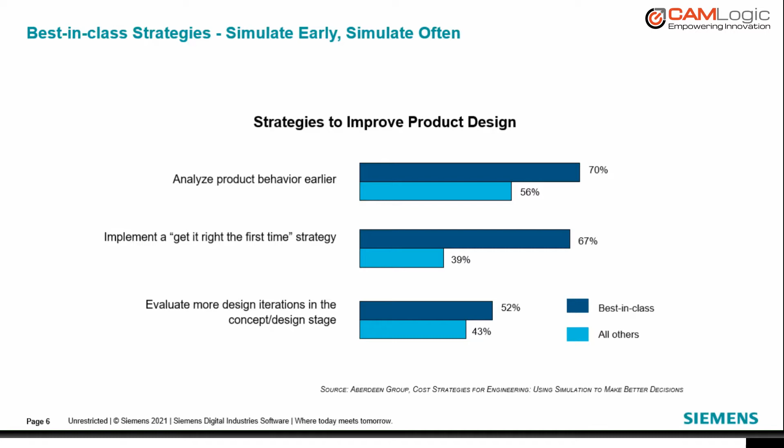So what are the issues facing design engineers today? The job that today's engineers are faced with has to cover a multitude of tasks in all phases of product development, including analysis, and involves the use of several products, each with its own user interface and method of working. Often, tasks like simulation are outsourced, which has the effect of separating analysis from the design process. This reduces the number of analyses that can be performed and prevents analysis from being used for investigative studies, which overall inhibits innovation in the design.

Some of the solutions available today are overly simplistic, which can compromise solution accuracy and create misleading results. The inability to edit geometry easily after analysis, and the lack of CAD associativity with simulation, inhibit the fast turnaround necessary for timely and effective design refinements.

Solid Edge simulation is one single integrated environment. It's using the same underlying geometry and user interface as all Solid Edge applications. Solid Edge simulation is easy enough for any Solid Edge user who has a fundamental understanding of FEA principles, yet robust enough to service most of your analysis needs.

By enabling engineers to perform their own simulation, more analysis gets done in less time, improving quality, reducing material costs, and minimizing the need for physical prototypes without incurring the high cost of outsourced analysis. The layout of the user interface is designed to guide the user through the whole analysis process, which makes it easy to learn initially and revisit if necessary.

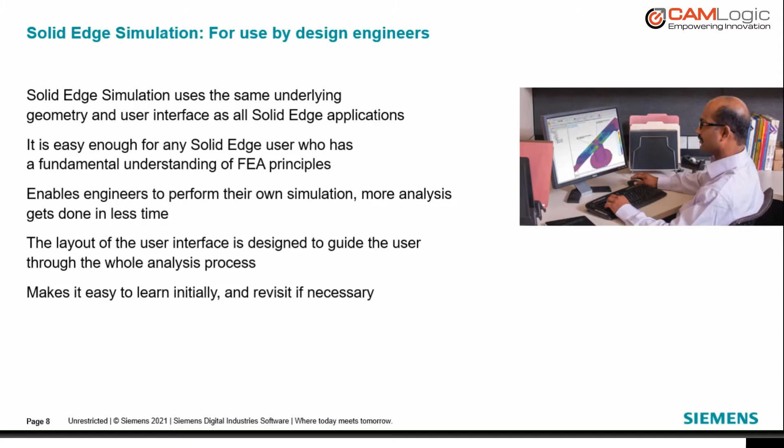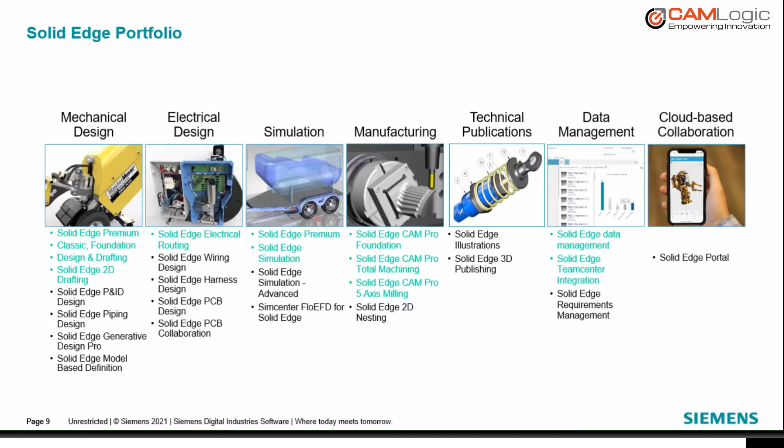This slide shows you the depth and breadth of the current Solid Edge portfolio. If you look at all the solutions highlighted in blue, these were all launched in the last few years, so a huge investment from Siemens into Solid Edge. Note that Solid Edge simulation goes into the third column, specifically dedicated to FEA products that are part of the Solid Edge portfolio. Siemens recognizes the importance of delivering highly capable analysis tools to the customer base.

SolidEdge portfolio covers the majority of analysis needs encountered by customers. Besides mechanical simulation, there are tools for heat transfer analysis. Thermal simulation in SolidEdge simulation is mainly thermal conduction, which is the heat transfer inside of objects.

This helps users simulate the thermal effects to the structure, such as thermal stress. The heat convection depends on the fluid flow, so it's important to simulate the fluid flow to understand the heat convection performance. FloEFD is the fluid flow simulation solution, and it can handle heat convection along with fluid flow.

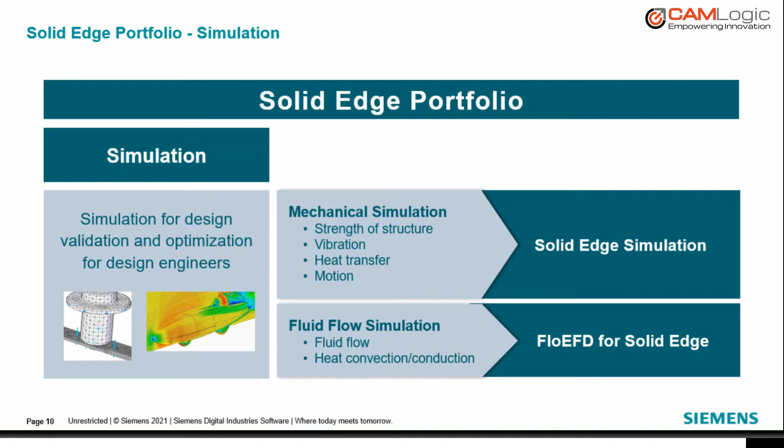SolidEdge simulation provides both automatic and manual methods of mesh creation, with precise local mesh control for higher accuracy. A full complement of loads and constraints is available for defining realistic operating environments. The underlying solver technology is Nastran, the de facto industry standard solver for finite element analysis.

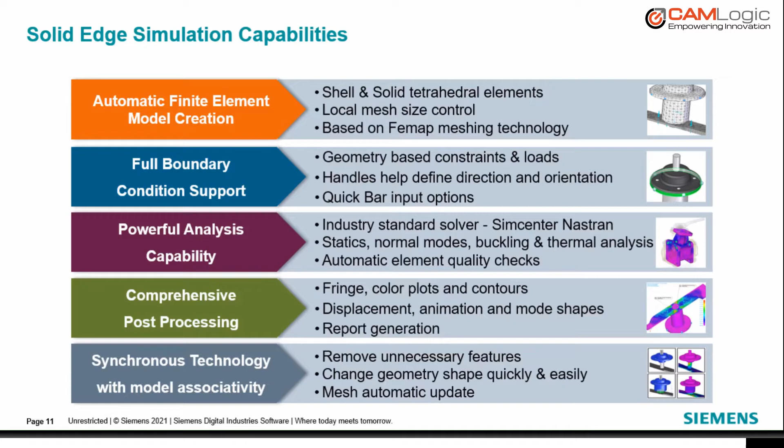A variety of analyses can be performed, including statics, normal modes, frequency response, buckling, and heat transfer. Users can interpret and understand the resulting model behavior quickly with comprehensive graphical post-processing tools. Synchronous technology allows for history-free model changes at will, which drastically speeds up the model refinement process.

SolidEdge simulation can take advantage of Simcenter FloEFD for SolidEdge, which is part of the SolidEdge portfolio. FloEFD is a fully CAD-embedded computational fluid dynamics software used to perform analysis of heat transfer and fluid flow design. Key FloEFD features include an intuitive user interface, meaning a short learning curve, and use of native SolidEdge CAD data.

No translation or fluid body creation is needed, with automatic recognition of model changes so geometry and simulation data are synchronized. There's a fast automated mesher and a unique solver that gets accurate results fast.

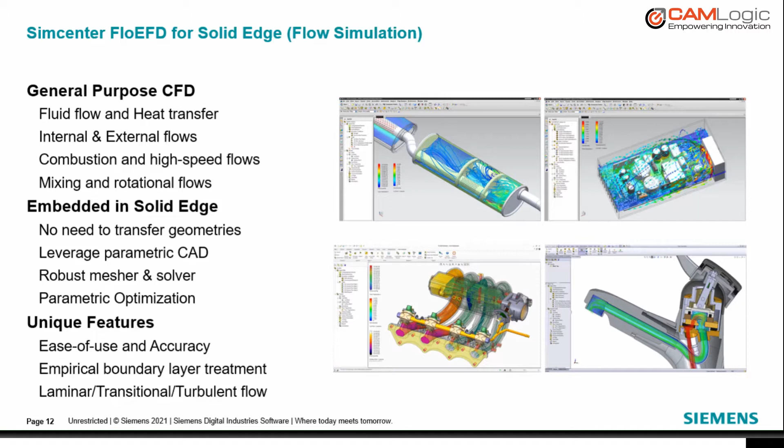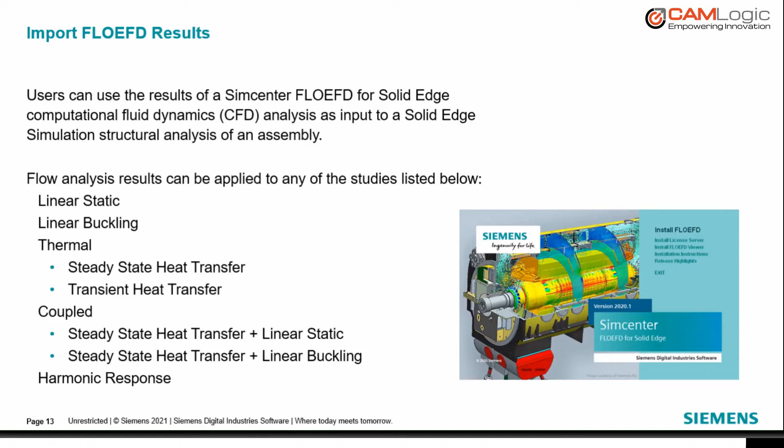Fluid pressure and temperature results can be imported from Simcenter FloEFD as structural loads for analysis. Integration between the two solutions is seamless and easy, as both are fully embedded in the SolidEdge environment.

Simulation functionality scales from individual parts to analysis of large assemblies, all the way to FEMAP with Nastran, enabling engineers to define and analyze complete systems. FEMAP is widely used in aerospace, defense, and marine industries, particularly for airframe loads, space vehicle stress and dynamics, and analysis of ship hulls and offshore platforms.

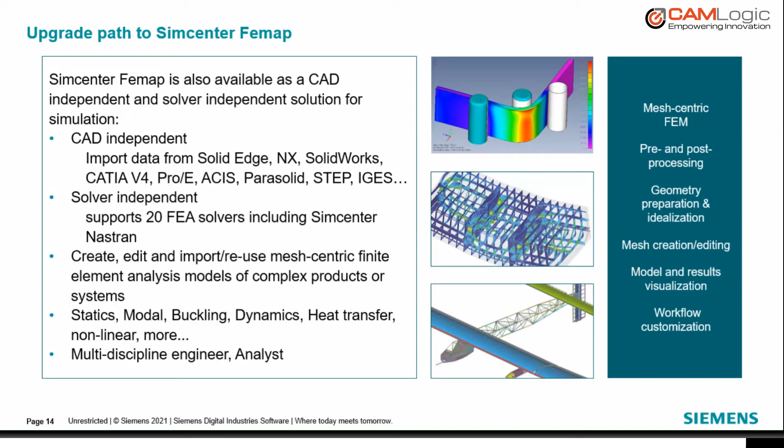The starting point for FEA model creation is generally the CAD model. FEMAP can be launched directly from SolidEdge, transferring in the geometry for analysis. FEMAP has extensive CAD model cleanup tools, in-depth functionality for mesh creation and editing, and can work well with orphan meshes for FEA model reuse.

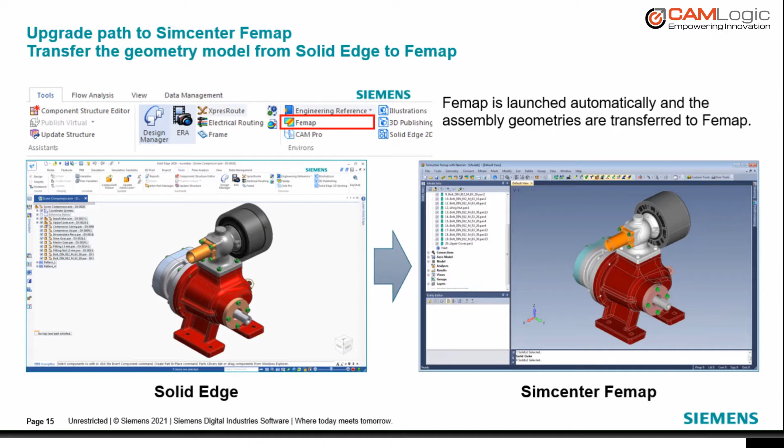Complete geometry and finite element models with boundary conditions and results can be seamlessly transferred from SolidEdge to FEMAP by saving the simulation model as a FEMAP file. Advanced types of simulation, such as nonlinear analysis, become easily accessible without losing any work done in SolidEdge simulation.

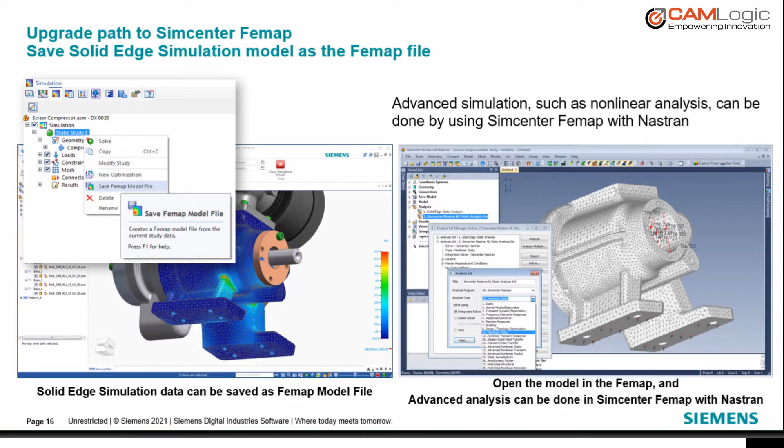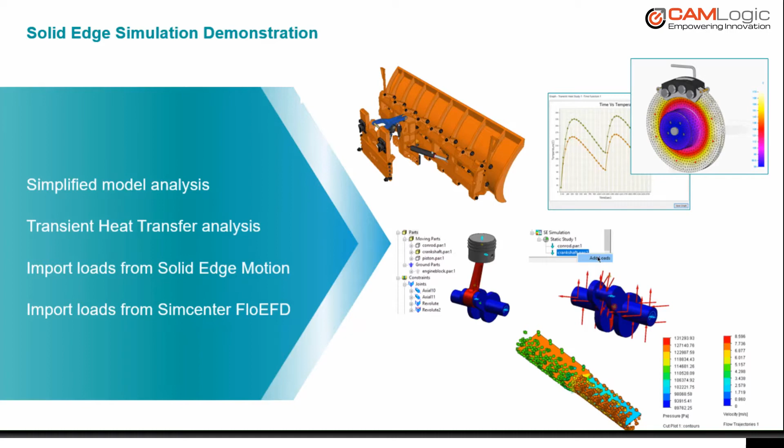So let's take a look at SolidEdge simulation in action. We're going to take advantage of tools available in SolidEdge, such as simplified models, as well as additional portfolio products for more accurate results. We're going to start by looking at SolidEdge simulation in action.

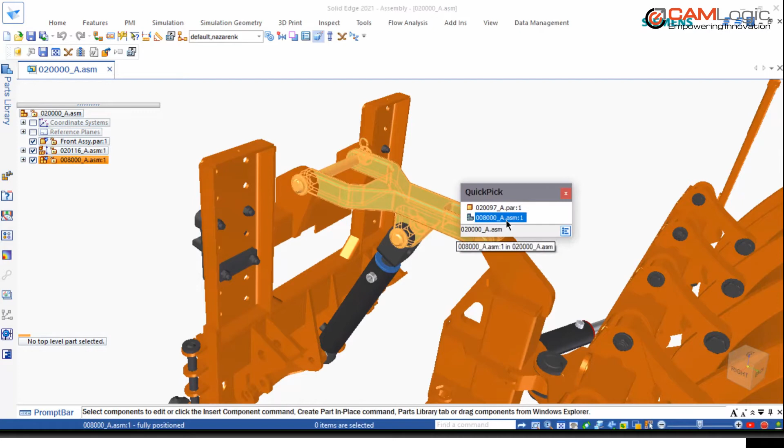For our first example, we're going to take a look at this plowing mechanism assembly that would be attached to a snow plowing machine. The first question would be how this bracket, or this arm connecting this mechanism to the frame, can withstand the loads introduced by Mother Nature. So let's open this assembly and focus on this particular mechanism.

First of all, I'd like to mention that SolidEdge simulation is tightly integrated with SolidEdge, and I'll prove this to you in a second. But first, let's isolate the information on the screen that we're going to be working with. One thing I'd like to point out is that one of the benefits of this tight integration is the ability to use SolidEdge functionality that helps us in setting up a study and getting results quickly and efficiently.

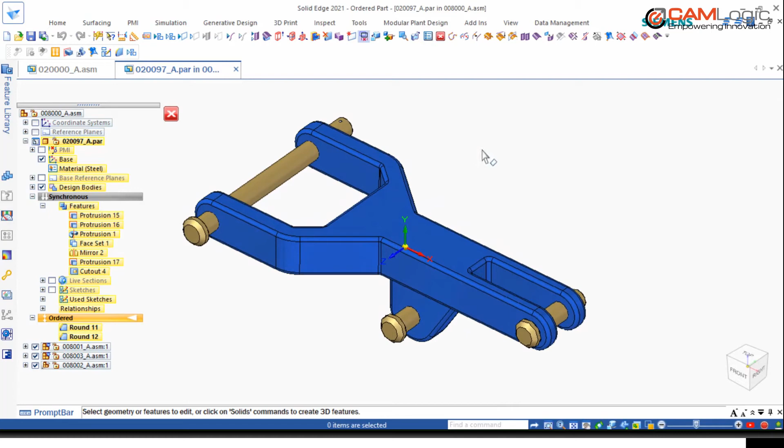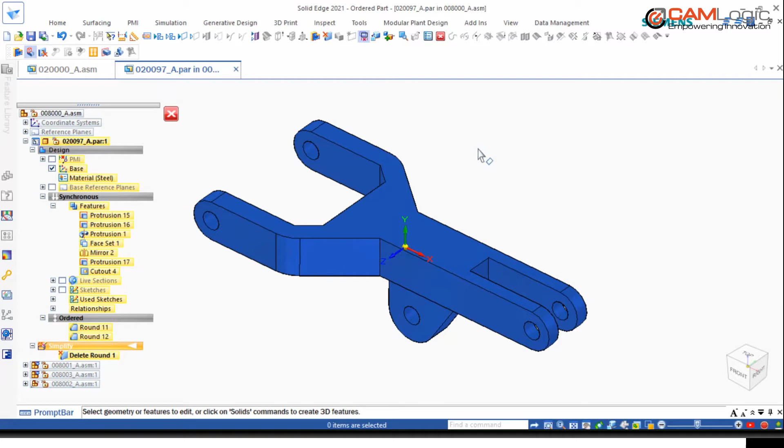First, I'd like to point out that we can take advantage of the ability to simplify the parts. This will reduce processing time and allow customers to get to the results much quicker. We can delete single rounds, or we can delete the whole feature. In this case, I just got rid of all the rounds in this part. And when I say delete, I didn't mean delete completely—I meant that we can take this part and use a simplified version of it for our study.

So let's start our simulation. It can be accessed directly from the simulation toolbar, and you can see I can create a new study. Here we provide the ability to analyze designs in many different ways. First of all, we provide the ability to do linear static analysis, normal modes, linear buckling, steady state heat transfer, a combination of linear static and buckling with heat transfer analysis, and harmonic response, which is essentially vibration analysis.

We also provide the ability to define different types of mesh, which is very beneficial because sometimes you deal with a thin wall component that requires a surface type of mesh, or even a mixed type of mesh when you combine regular models with thin wall components.

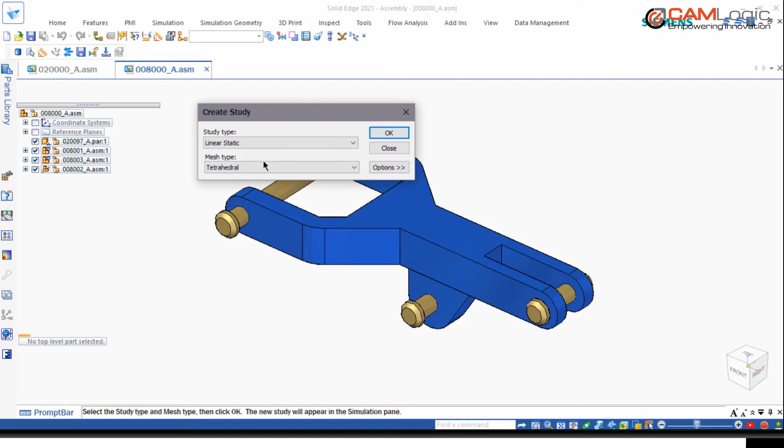Right now we're looking at linear static with tetrahedral mesh. We can select all the components and include them in our study.

One thing I'd like to mention is that the Solid Edge interface is very flexible and user-friendly. I can turn on the simulation sidebar and move logically from top to bottom applying loads and constraints, or I can go to the simulation tab on the command bar and move from left to right.

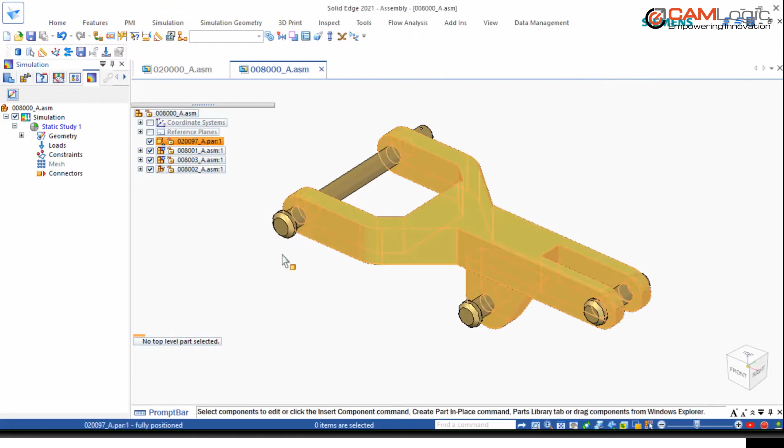So let's start applying some loads. Before I do that, I can go quickly to the original assembly and measure an angle. This allows us to more precisely, let's say if I measure the angle between the two faces, it gives us about 34 degrees. This will allow me to apply loads in a more realistic way, mimicking real life conditions.

So let's go and apply loads. Again, we have many different types of loads depending on the type of analysis. As you can see, right now we're doing linear analysis, so thermal loads are disabled. So we're going to start with force, and we're going to apply force to this particular pin.

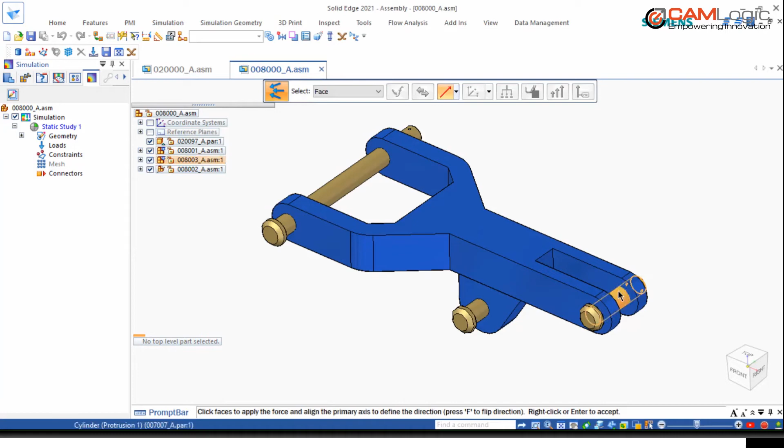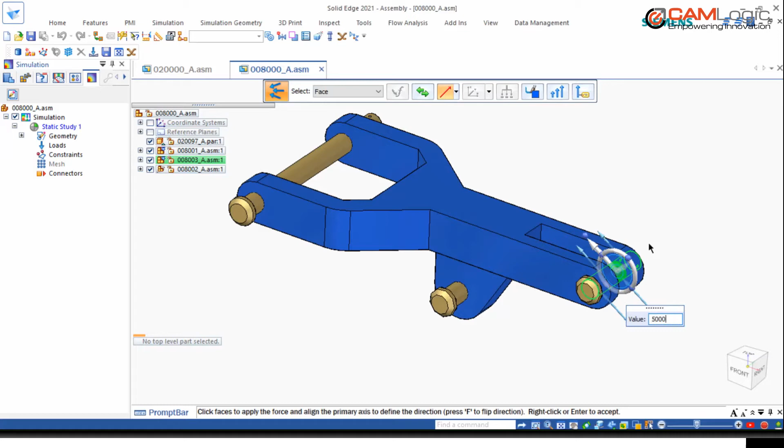One thing I'd like to mention is that the same tool we use to manipulate geometry, the steering wheel, we're also using for directing the force in this case. Conveniently, I can type in the value as a formula, and the system will allow me to position it properly. I'd also like to point out that Solid Edge Simulation is a units-neutral solution. So we can type in, let's say, 5,000 pounds of force, and the system will recalculate and apply the load appropriately in whatever units are currently active.

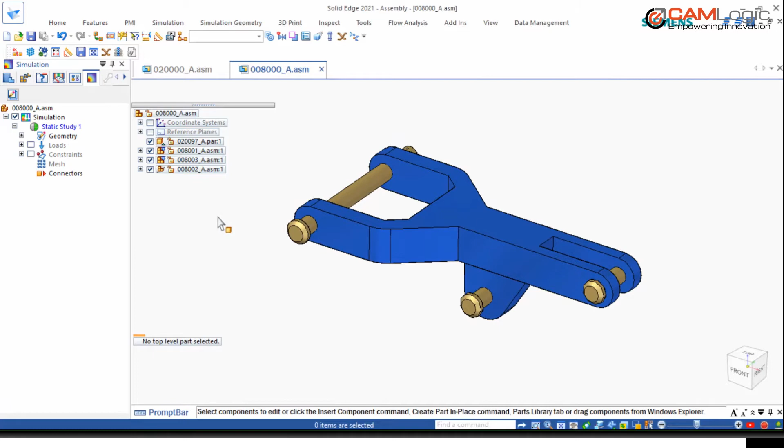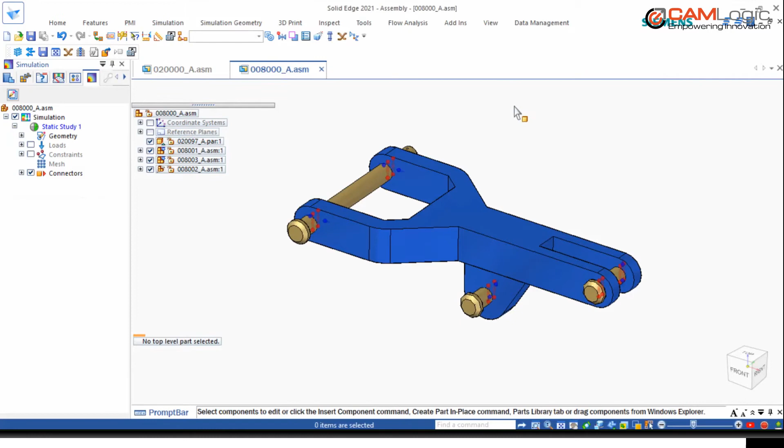As far as constraints, we have many different types. In this case, we're going to lock these two pins so we can run analysis against them. Finally, we come to a point where we need to define relationships between all these components. We can conveniently define automatic relationships by selecting all the components, and with one single button click, the system will present us with a list of different connectors we can use. If you want, you can get rid of some connectors, or delete multiple. In this case, I'm going to accept all the defaults. And in one single click, if I go to the mesh dialog box, I can mesh and solve immediately within the Solid Edge Simulation environment. This assembly isn't very complex, so we can easily use mesh and solve in one single operation.

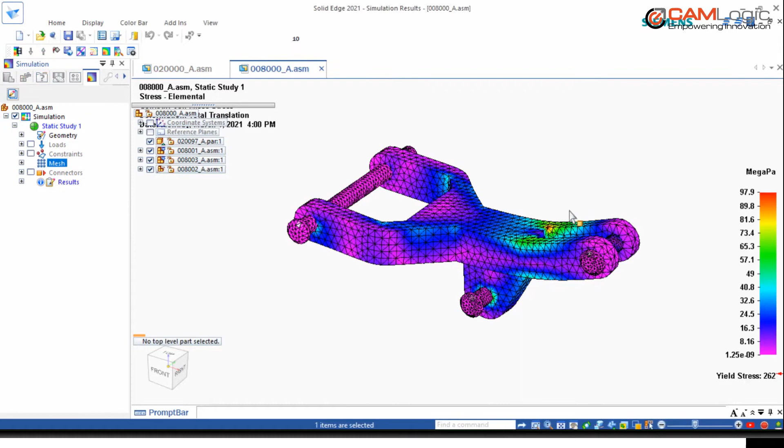Results pop in. We're looking at the post-processing window, which is really important for interrogating results, and it provides users with many different options. We can take a look at animation. It's a very important part of the interrogation because you need to evaluate how the system performs under stress and make any adjustments if necessary.

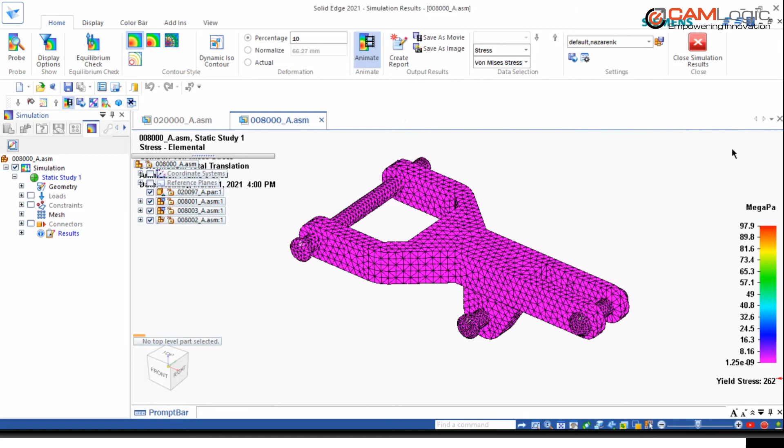You can turn different options on or off. You can save it as an AVI or movie. In this case, you can look at results in many different ways. One in particular is the ISO contour, where you can dynamically walk through your design and isolate a specific value for stress, and see how it distributes throughout the part.

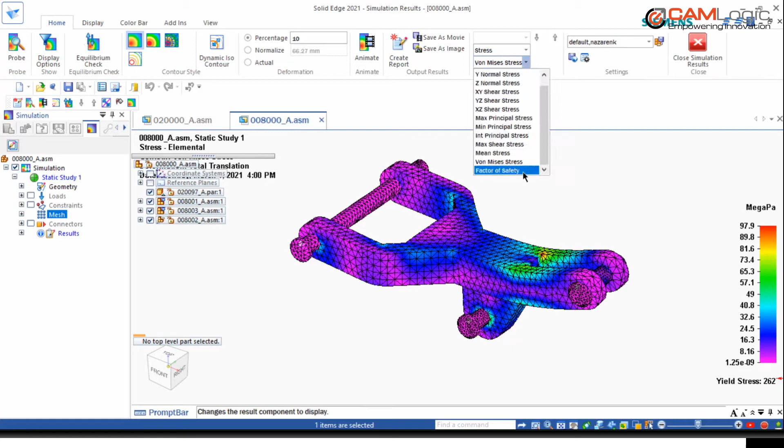In this case, I'm interested not only in stress but also factor of safety, because it's a very important component. So users can define different custom values. Let's say we're looking at a value between 4 and 5 since it's a very important component, and you can see this is not strong enough to support that factor of safety.

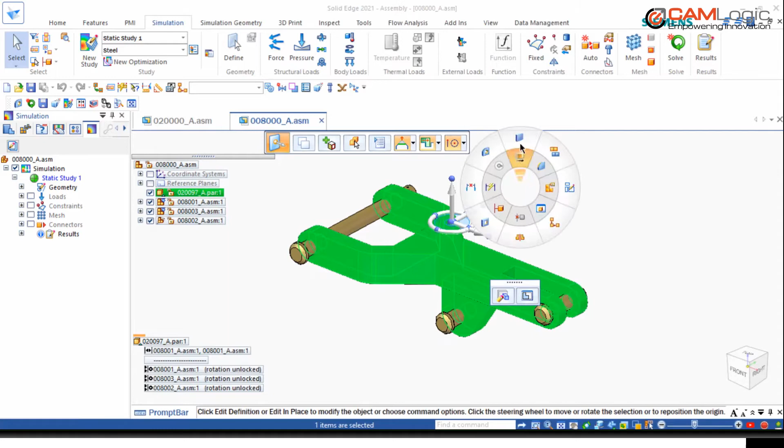So we can quickly go and customize our part. Again, conveniently, because it's one single integrated environment, I can immediately get access to the features of that part even from assembly level. I don't have to dive into the part.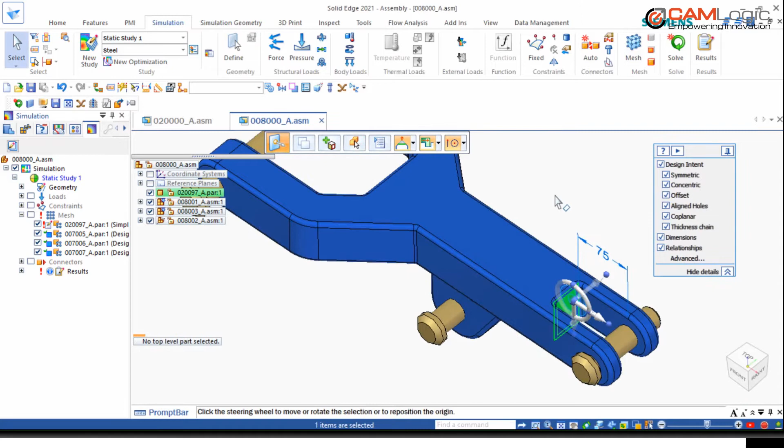I can pick this value and modify, make those ears slightly thicker. Also, maybe we don't need to have this so deep pocket here. Again, using synchronous technology, I can easily manipulate this geometry on assembly level without diving inside of the component. You can see how quickly I can manipulate this face on the ear on the bottom.

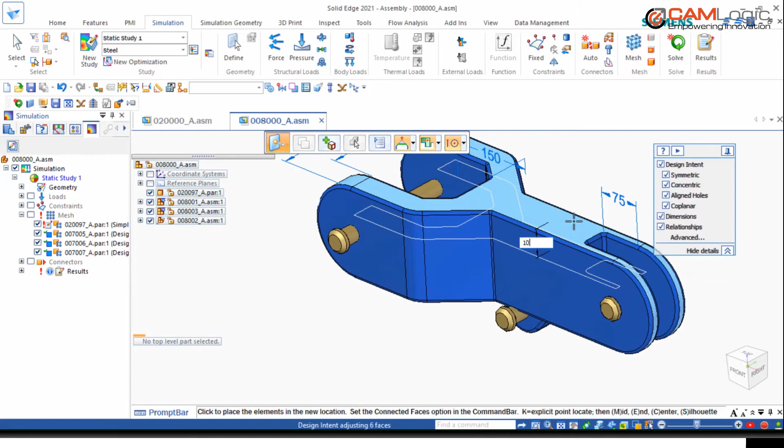Let's say I want to make it slightly stronger, and of course I can beef up the whole part if I want to, so let's make it thicker by 10 millimeters. You can see how quickly and efficiently I can modify the geometry, and it's pretty much done in no time without needing to go into the actual part.

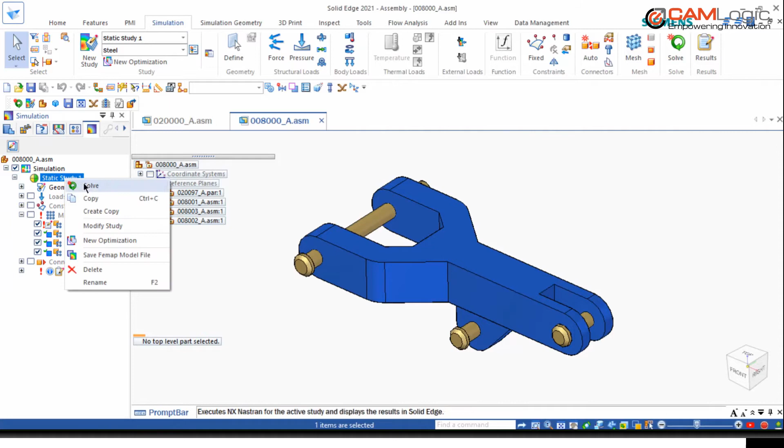And because it's one single integrated environment, not only are we using the same tools to manipulate geometry, but all I have to do is just click solve. The system knows how to remesh the model based on the new geometry configuration, it knows how to apply all those boundary conditions and loads, and we're going to get results in no time.

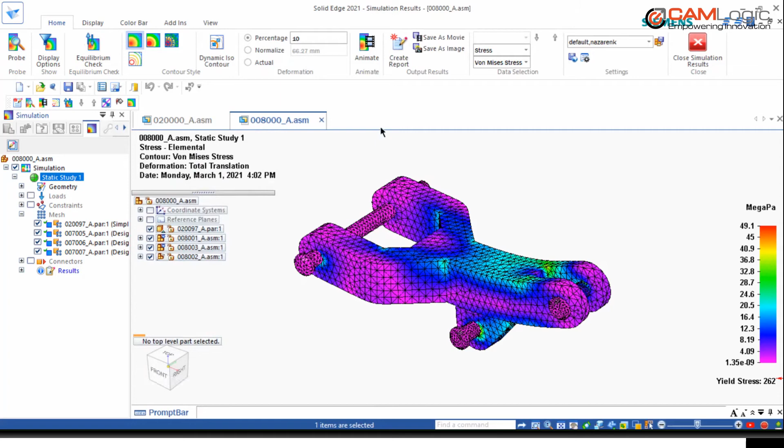As you can see, stress is significantly less than previously, so we can easily switch to factor of safety and define the same value that we were looking for before. Right now the part is green throughout, which tells us it's strong enough to withstand that particular load.

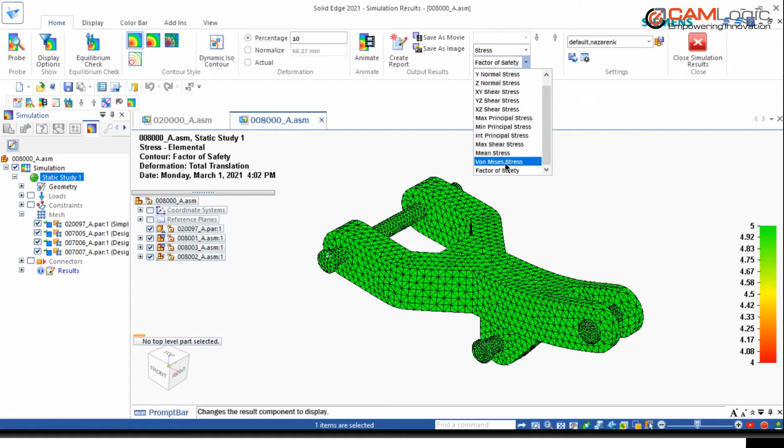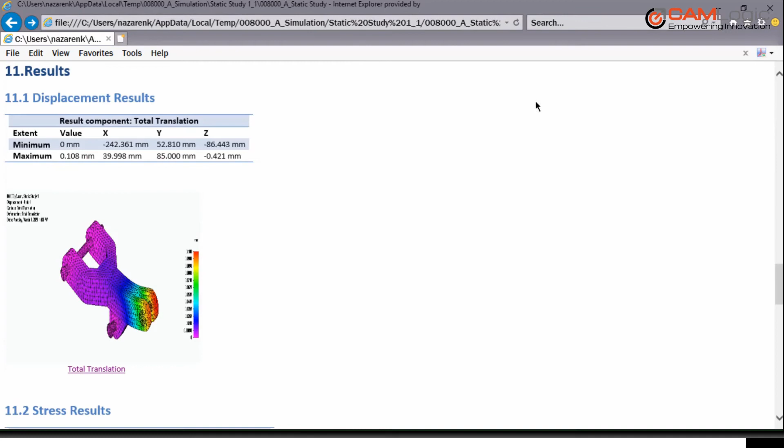And finally, if I go back and define, let's say, one more stresses or displacement, I can easily capture this in a report. With one button click, I can capture a report on my design and save it for future reference or design review. It gives us a really nice table of contents - we can take a look at constraints, connectors, mesh information, and results. It's a very convenient way of capturing results for future reference or design reviews.

So now that we understand how Solid Edge Simulation works together with Solid Edge, and how tightly integrated it is, let's take a look at more advanced usage cases for this type of functionality.

In the next step, I'm going to show you a really advanced type of load that we can handle with thermal analysis. I have two studies created in this particular case, and we're going to be analyzing this brake mechanism. We're going to take a look at how we can control applying a particular load via a function versus just applying a steady state load.

First of all, I'm going to show you that we can go and create a new function, and we'll give it a name. In this particular case, we're interested in a real life simulation - let's see if a driver applies brakes to the full extent. Let's say at the first position, the factor is 1, and we continue at the next interval, it's still 1.

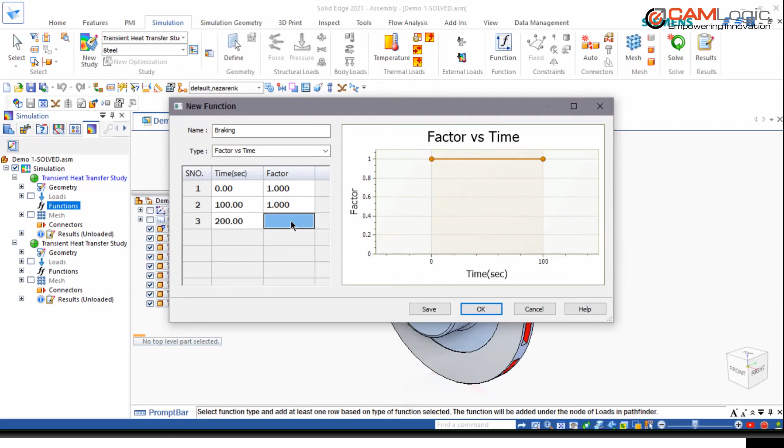You can see how on the right hand side, factor versus time, the system gives us a chance to actually simulate this function in a visual way. For instance, at 200 units we apply 0, which means the driver released the brakes, but then he reapplied them again, this time at half of the previous force.

So we continue with this one, and then finally he released the brakes again - let's say at 500 units we're back to 0. You can see how we can quickly identify this factor-versus-time type of application of this constraint, and we can save this function.

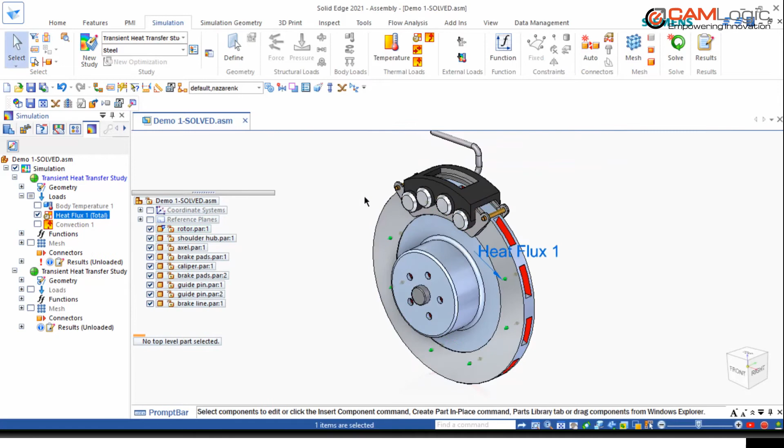If we go back to loads, we can easily identify a particular load, which is heat flux, and instead of applying a steady state load, we can apply this particular function and solve it. I'm not going to waste your time solving it - we're going to just take a look at the results.

And we applied a similar function in the second study. One of the convenient and very efficient ways of looking at these results is to probe them. We can easily identify different points and probe different results, so we can identify values for the temperature, and quickly display the graph showing the distribution of temperature versus time.

In this case, we're looking at a transient type of analysis, which means the temperature is changing versus time. At first, when the driver applied the brakes at full force, we're up to 200 degrees, then it's released, and then again it applied half force.

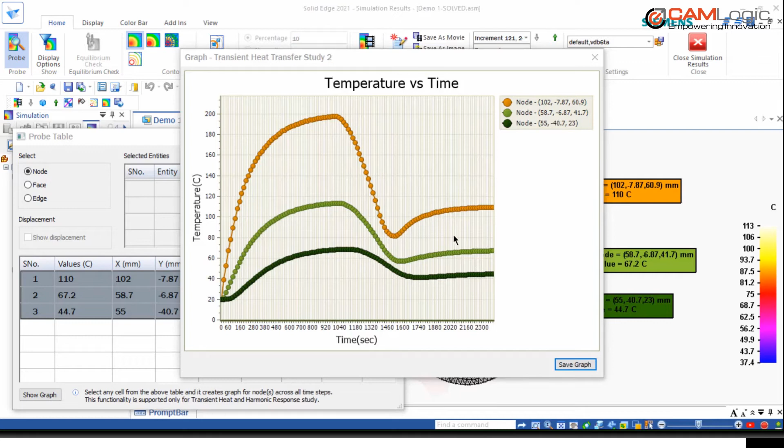So we can save this graph with the file, and again it's available later for reviews or future analysis. You can see how in this particular case it's very beneficial to have this new ability to apply function when it comes to different loads, when we talk about transient type of analysis.

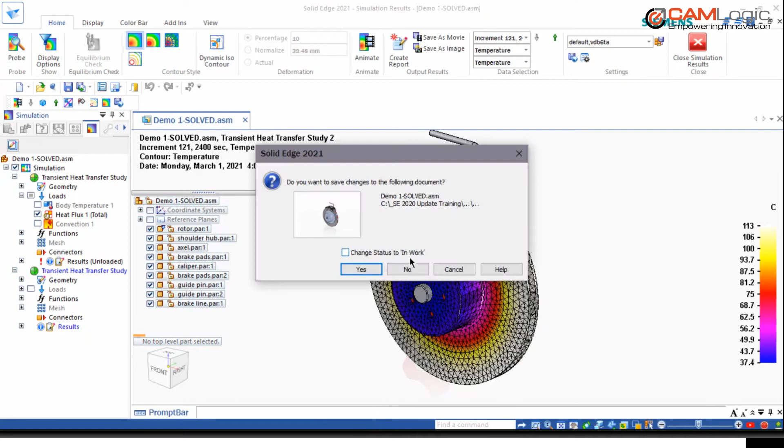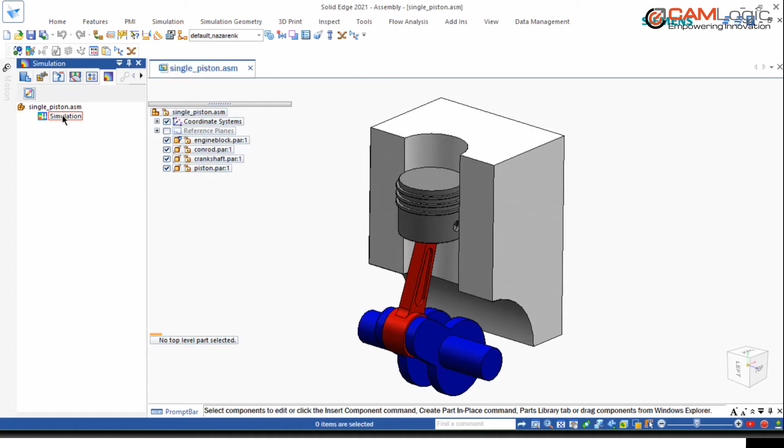Now let's take a look at how different products within the Solid Edge portfolio will help users efficiently analyze their designs and arrive at the most optimum solutions. In this particular case, we're going to use Motion, which is now part of Solid Edge portfolio products and includes full dynamic designer functionality. We're going to bring loads from that environment and apply them in Solid Edge simulation.

In order for this to happen, all we have to do is create a static study. In this particular case, we're interested in the crankshaft. As far as constraints, all we have to do is fix these two faces outside of the crankshaft, and we're pretty much done. That's all that is required.

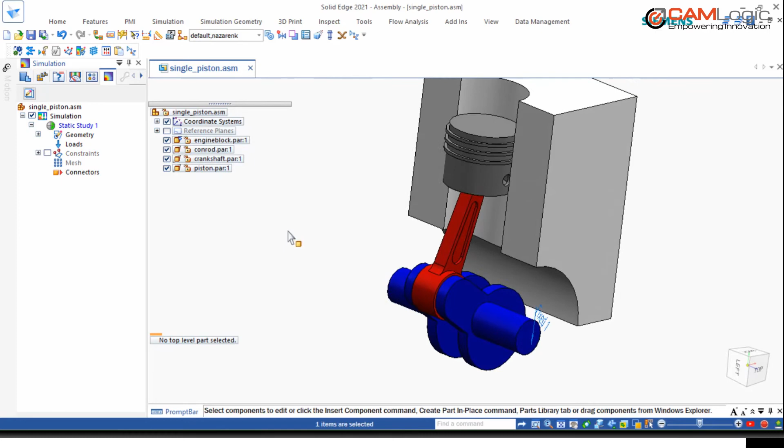We're not going to apply loads manually because, as I mentioned, under the environments tab we'll find the motion environment. Once the system takes us into the motion environment, we can easily create a new study and new mechanism, for cylinder analysis.

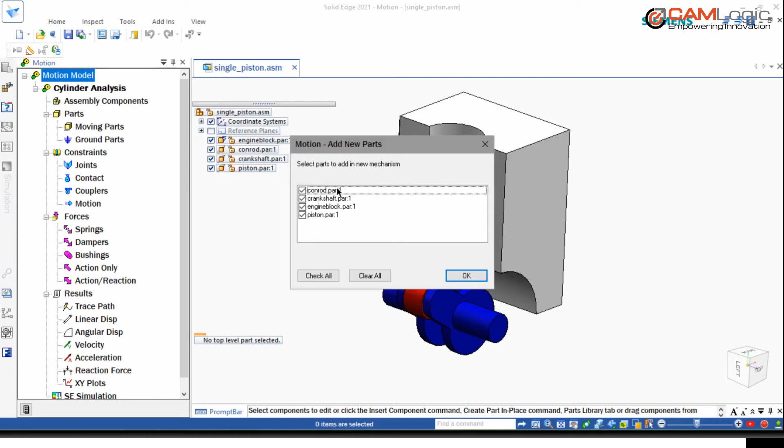You can see that there is a tight integration between these products because we're using the same environment, pretty much inside of Solid Edge. Based on Solid Edge assembly relationships, components are placed automatically in the categories of moving components and grounded parts, and the system conveniently places them appropriately in the correct categories.

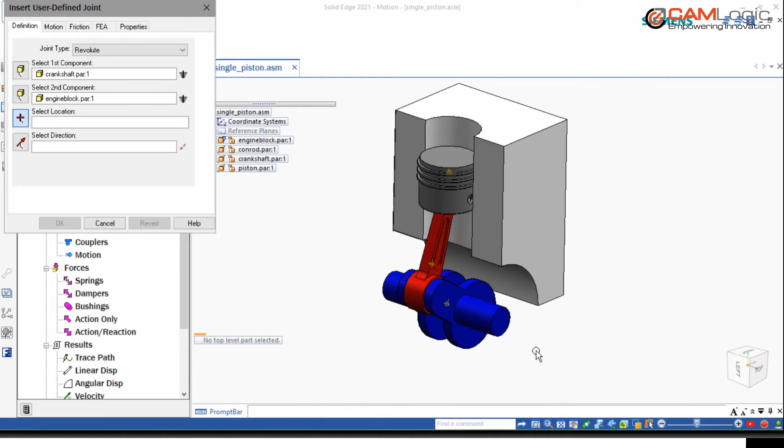But you notice that joints are not created, and joints are responsible for defining movements inside of this analysis tool. So we can go and create those joints manually, defining the orientation and position as we go along. You can see we have all kinds of different joints available: cylindrical, spherical, revolute, translation, and so on.

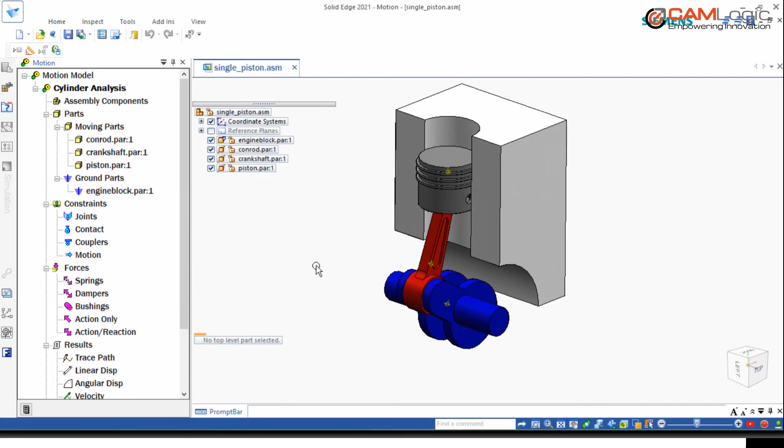But let me show you the benefits that users derive from using this one single integrated environment. Once I go back to the Solid Edge environment and go into the Assembly Relationship Assistant, we can see that a lot of these relationships are suppressed. So very conveniently, we can select all of them and unsuppress all at once.

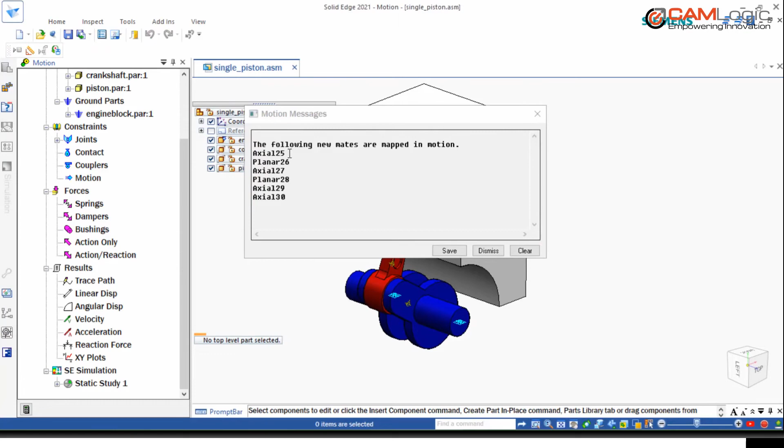Now when we go back to the motion environment, you can see that the system immediately picks up on the fact that we have new relationships. At this point, all the joints required for this mechanism to act properly are created automatically. This is a great time saver and effort saver, so for users this help is invaluable.

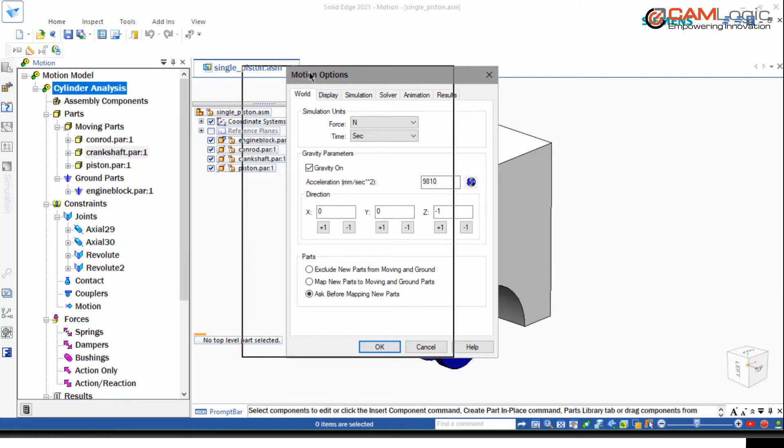Let's move on and define some forces. But before I do that, I want to go into the system default and show you how flexible the system is. Right now, by default, Solid Edge Motion doesn't know in which direction we want gravity to act on it, so we change the direction for gravity.

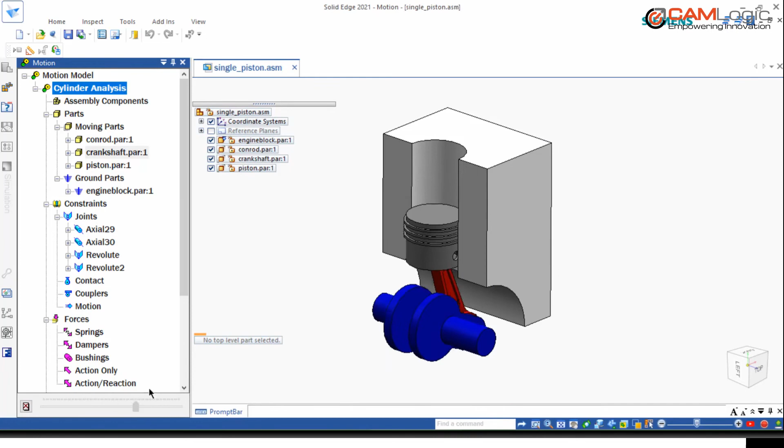While we're here, we can easily change the parameters of our animation. You can see if I start our simulation, under gravity the system moves in a proper way, but it moves inconsistently because only gravity is affecting this mechanism right now.

So let's go and apply an additional motion. First, we can select one of the joints, go into properties, and switch from free type of motion to velocity, 360 degrees per second. Once we apply that, we can see that the motion performs the way it's supposed to.

Another thing I'd like to point out is that the whole reason we're doing this is we want to extract the forces acting on this crankshaft, and that can be easily accomplished. Now within Motion, within Solid Edge, we can apply forces.

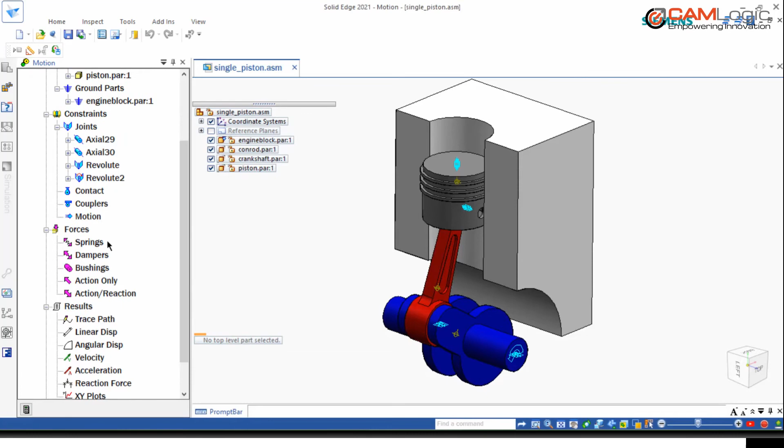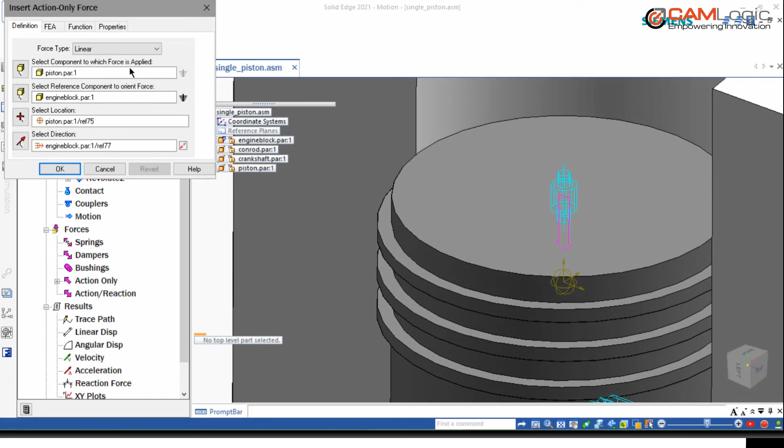For instance, we can apply a force that acts as a pushing force on this piston. We can define position, define orientation, and we have the ability to switch the direction of this force acting on the piston. At the same time, we can conveniently define the value - based on some research I've done, it's about 1150 newtons for a single cylinder of an average car acting on that piston.

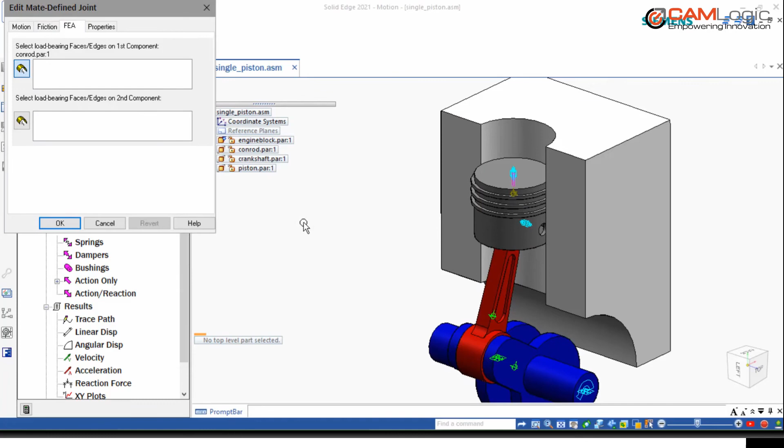We also need to transfer that force acting on the piston into this couple, the conrod and the crankshaft. That can be easily accomplished via properties - we can go into FEA and define how those FEA parameters would apply. The system even conveniently gives us a hand, so we can see that the first component is a conrod. We can turn off the crankshaft, select the cylindrical face on the conrod, and then select the corresponding face on the crankshaft.

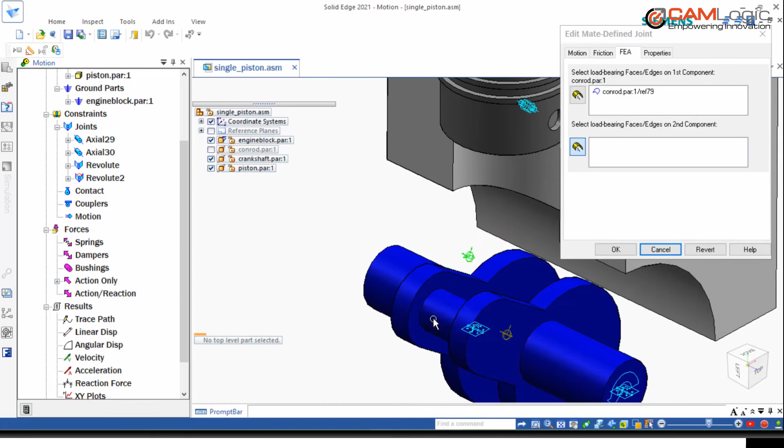And now, since we created this, we can easily animate, or I should say simulate, our design. And the advantage of applying dynamic forces is that we can always go back to this revolute and...

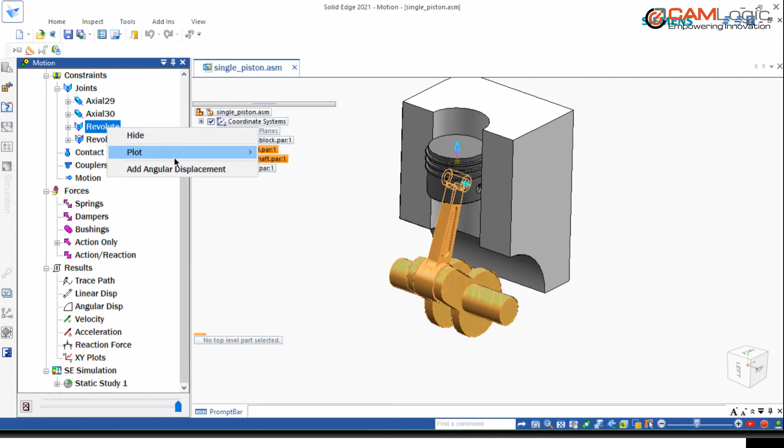Plot different characteristics. So we can plot reaction force acting on that couple, the X component and the Y component. We have many different options when it comes to plotting—we can plot momentum and other characteristics.

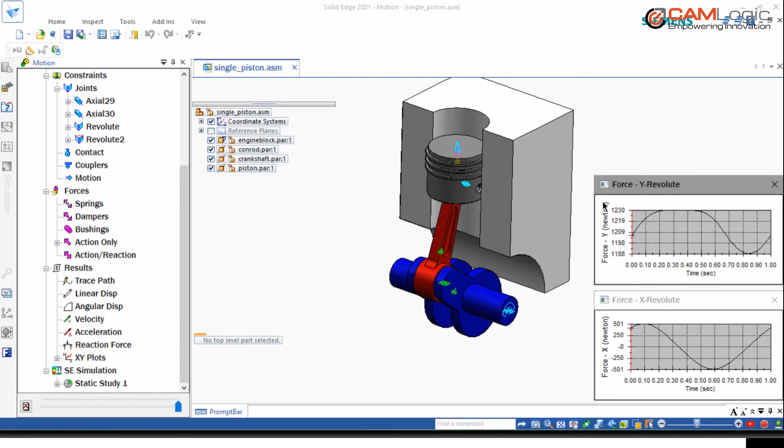Not only can we see where the force is greatest—you can see it's greatest in the Y direction—but by clicking at this diagram, we can place the mechanism in the appropriate position where the force is the greatest. Once we've done that, we can right-click on that crankshaft node and say add loads.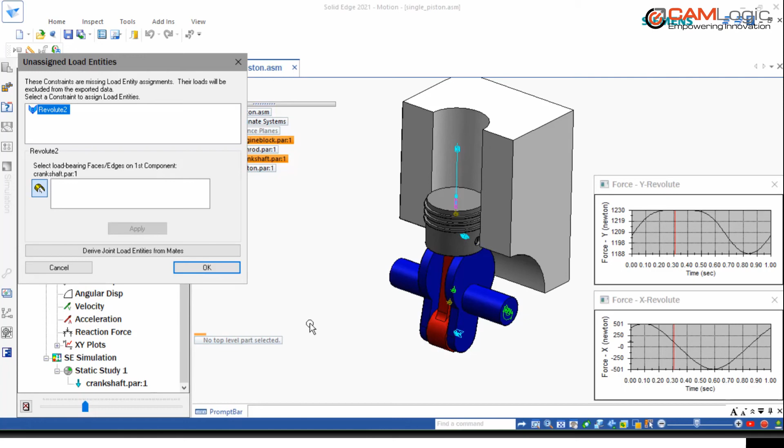Solid Edge is constantly looking over your shoulder to make sure you're not missing anything. In this particular case, it's missing some face definition for the crankshaft, so we can add those couple faces, and we transfer the load in the most critical orientation to the simulation environment.

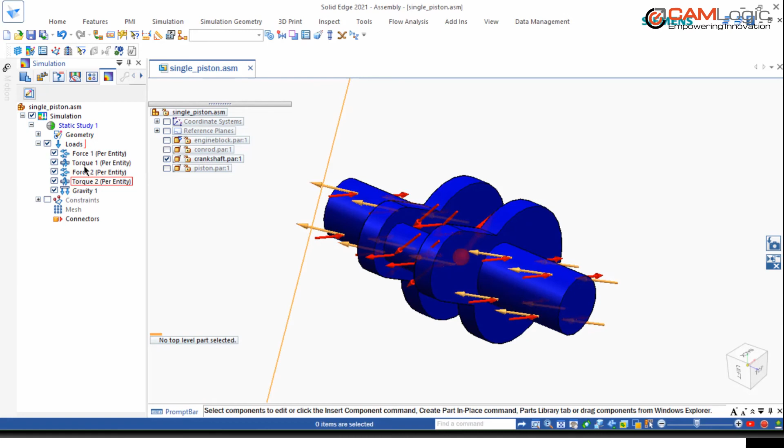So when we exit motion, you can see that all kinds of forces, torque, and gravity are applied appropriately based on that simulation inside the motion environment. You can imagine it would be very hard to come up with this type of loads on your own without the help of motion.

What's left to do is pretty much just mesh and solve. This is a really simple case, so meshing and solving will take only a couple seconds. And when we look at the results inside the Solid Edge environment, we can easily animate this and see how this mechanism is deformed under the loads derived from motion.

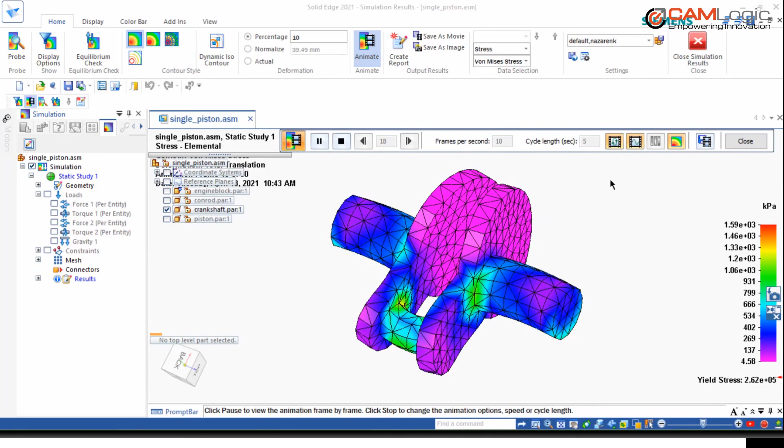In the next segment, we're going to take advantage of the ability to import pressure from CFD analysis. In this particular case, we're looking at a pipe reducer. You can see the flow of liquid going through a bigger diameter pipe into a smaller diameter pipe, connected with a reducer. Let's see how we can easily import that information into our Solid Edge simulation.

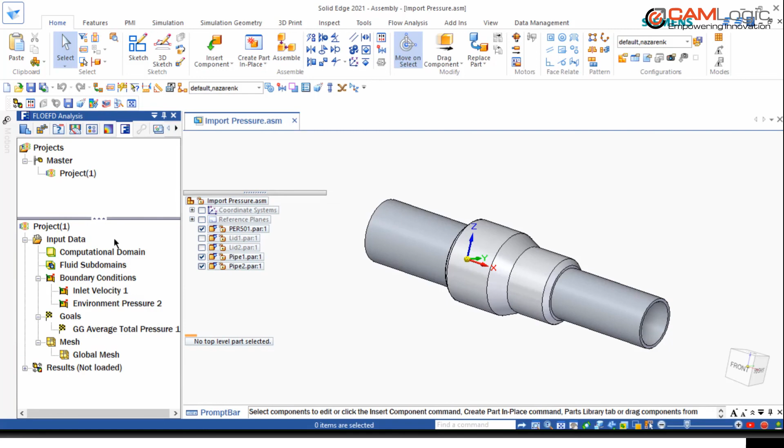In this case, I'm looking at the results in load results into flow analysis, which is again available as part of the Solid Edge portfolio products. Let me show the plot for cut plots as well as flow trajectory. And if we hide all the components, we can easily animate these particular results.

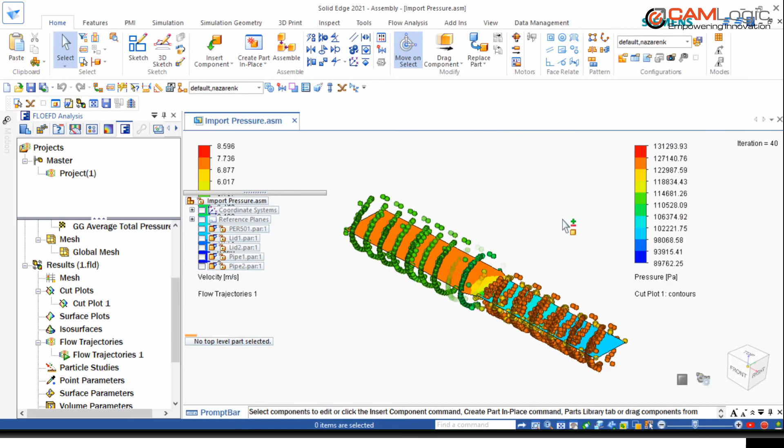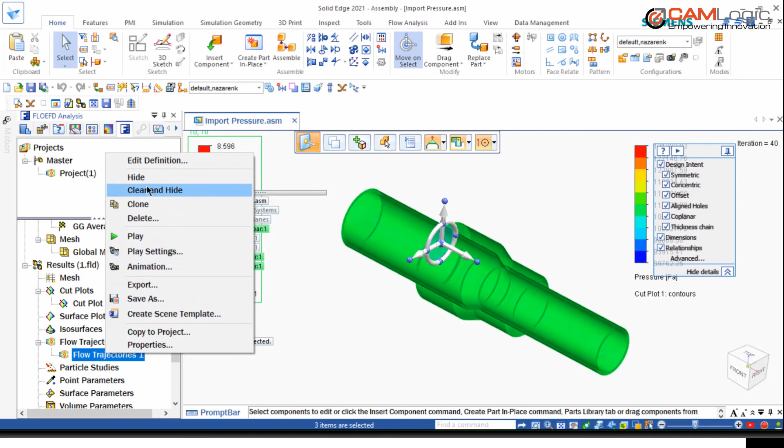As we're looking at this particular case, we can see that pressure drops from a bigger diameter to a smaller diameter, while velocity is increasing based on the color map in this animation. Let's stop this animation—now we're ready to actually export these results into a Solid Edge simulation study.

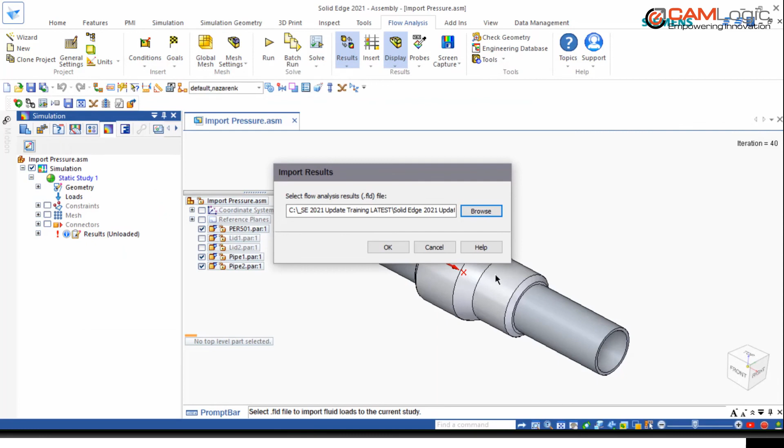All we have to do is just go under Tools and Export Results to Simulation. Now we're ready to go to Solid Edge simulation, and under Loads we can conveniently import these flow pressure results and apply them to our study. All we have to do is just solve it.

So you can see how easily we can take advantage of the master model approach. In this particular case, everything that was modeled in Solid Edge allowed us to figure out the pressure inside of this structure, and then bring results back as loads in Solid Edge simulation and solve the study against that load.

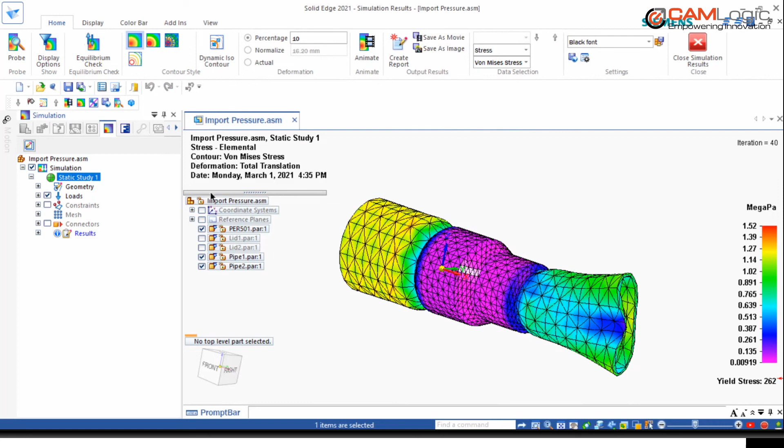So let's talk about Solid Edge simulation packaging. Powerful, scalable solution offerings allow companies to select the best simulation tools for their specific requirements. Whether it's linear static, vibration, or heat transfer types of analysis, companies can save money by choosing the appropriate configuration of their simulation tools.

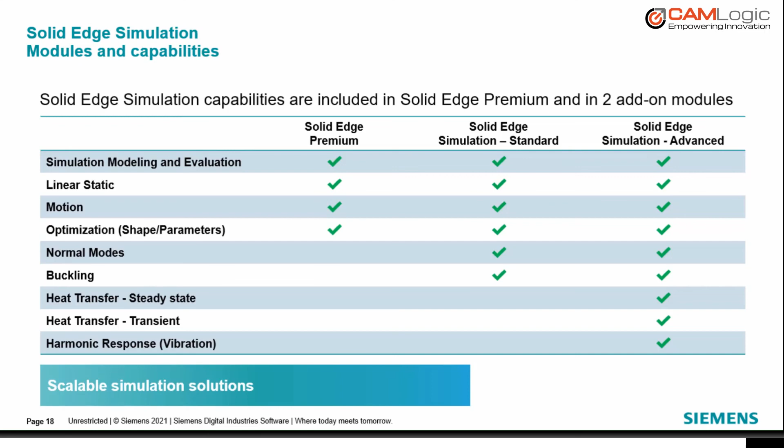Let's talk about some use cases out there. John Harder Company is an example of great success in using Solid Edge simulation for streamlining their processes. As a result, design time was cut from 4 hours to 15 minutes, job quotes dropped from hours to 20 minutes, and they were able to meet OEM weight certifications.

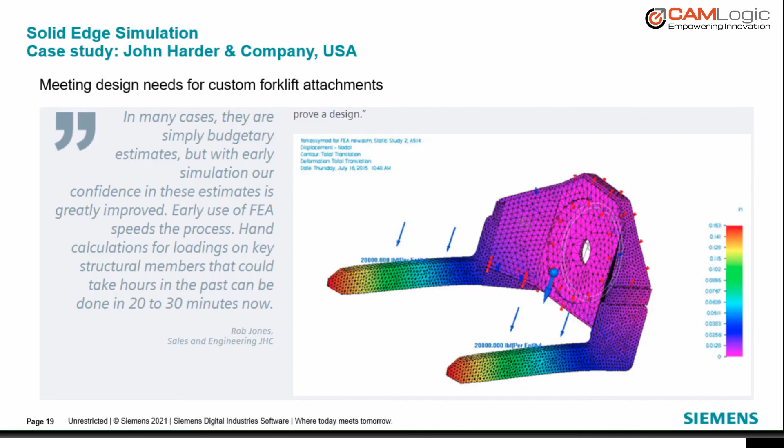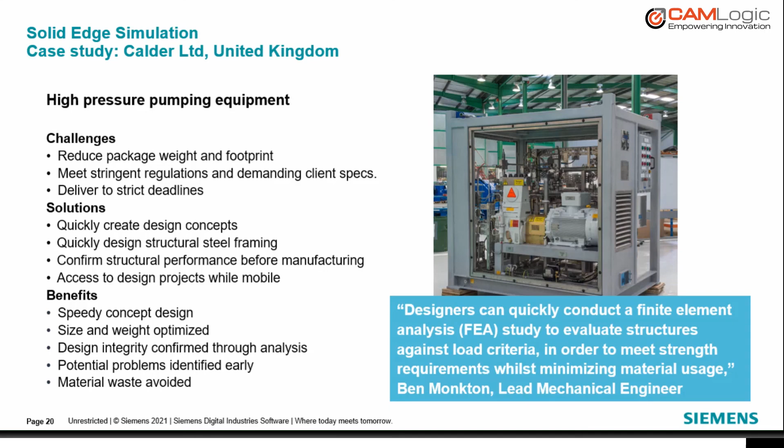Another company that benefited from Solid Edge simulation was Calder. It belongs to industrial machinery and heavy equipment, the manufacturer of high-quality pumping solutions. Size and weight optimization, design integrity, and materials waste avoided are just a few benefits to name.

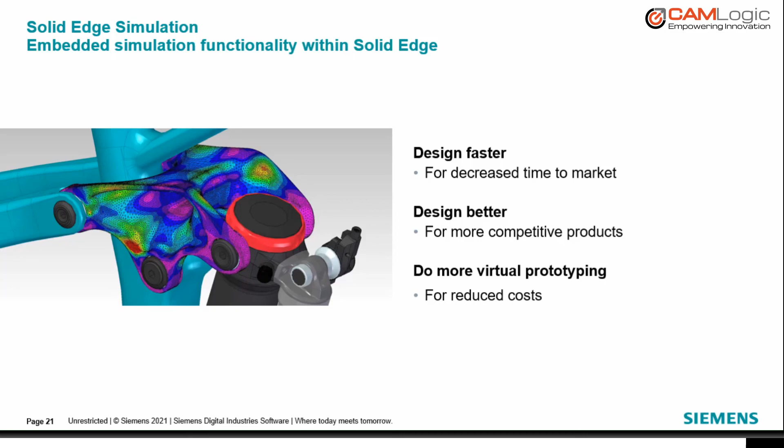Let's summarize the benefits that our customers are getting from Solid Edge simulation. They're getting their products to market quicker by doing the design faster. They're making more innovative and competitive products by improving their designs, and they're reducing costs by doing more virtual prototyping.